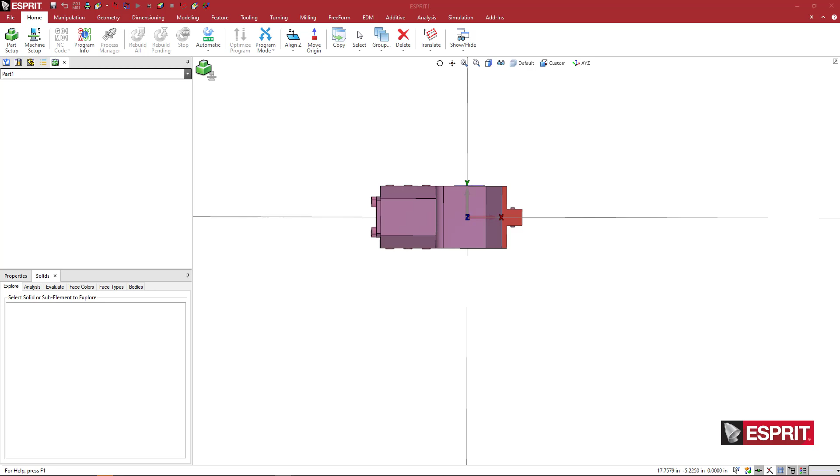Okay, so we're going to make a tool holder for an offset boring bar here, or ID work. And this one looks like it has the serrations, the notches on both sides.

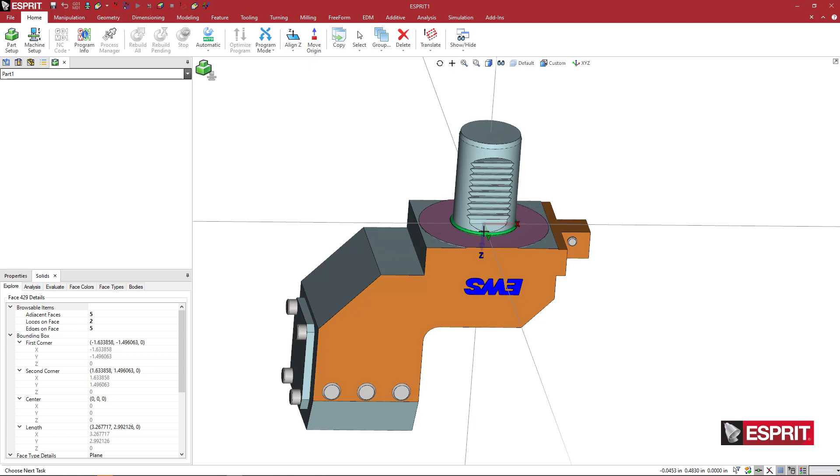The first thing we want to do is orient this in the correct orientation. This is the face that is going to be up against the turret. So when this is mounted on the OD, this face is going to be flush up against the turret, and the blue vector is normal to that, but we want it pointing the other way. So we can highlight this face and hit Align Z, and you'll see that it basically flips the model around.

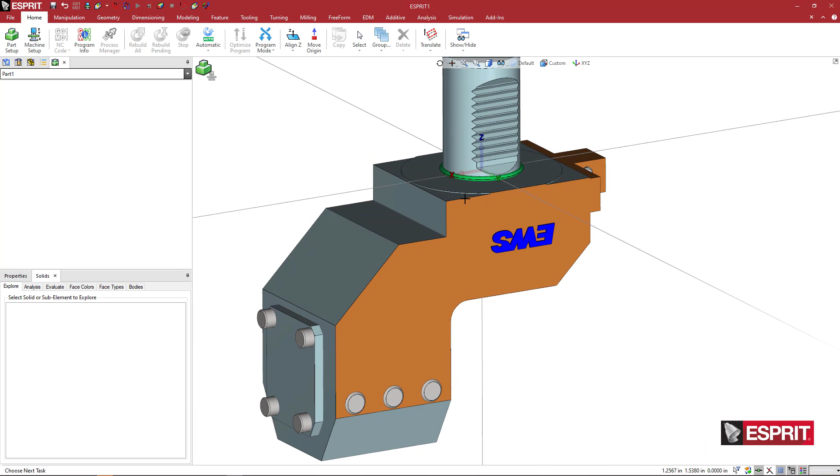And looking at this, this red X vector should point toward the main spindle. We have notches on both sides, so I believe this holder can be mounted in the machine either pointing toward the main or toward the sub, like the tool. This is the tool mount position down here.

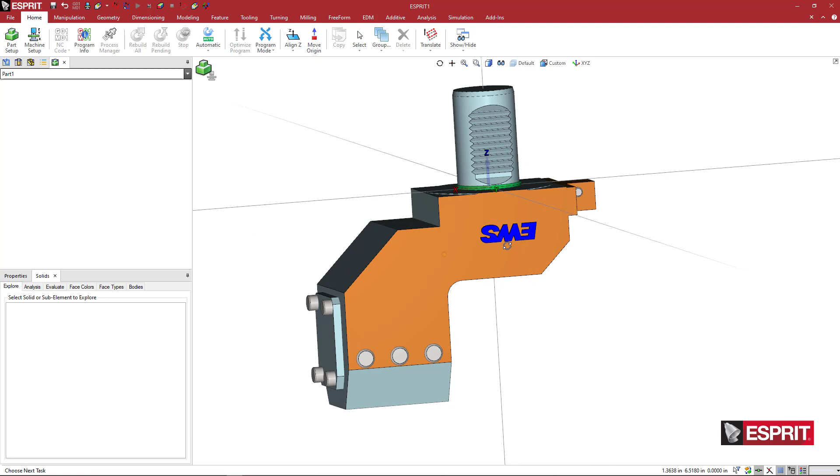Okay, so I had some messages popping up there. The tool is going to be going toward the sub spindle by default. If you've watched any of the other videos, you can always take this holder and flip it 180 degrees while it's mounted on the turret inside of ESPRIT. The tool and everything will move with it, so it's not a big deal if you want to go the other way. We don't need to make one for the main, one for the sub. We just need to make one, so I'm going to pick this orientation so that every time I load this onto a turret, by default, it's just going to be pointing toward the sub. And then if I want to edit that, I could do that later.

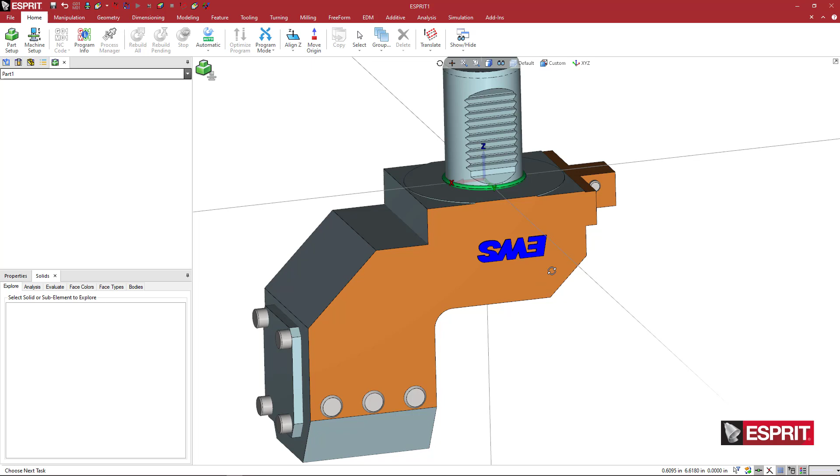So the first thing that I'm going to do is go ahead and make my tool position. What I want to do here is come to Translate, and you can access Translate from the home, then pick one of them. This is going to be the Translate. I'm going to move to, and you can see the highlight moves to the center selection of that face, of the bore on the face. So I'm just going to go ahead and pick that.

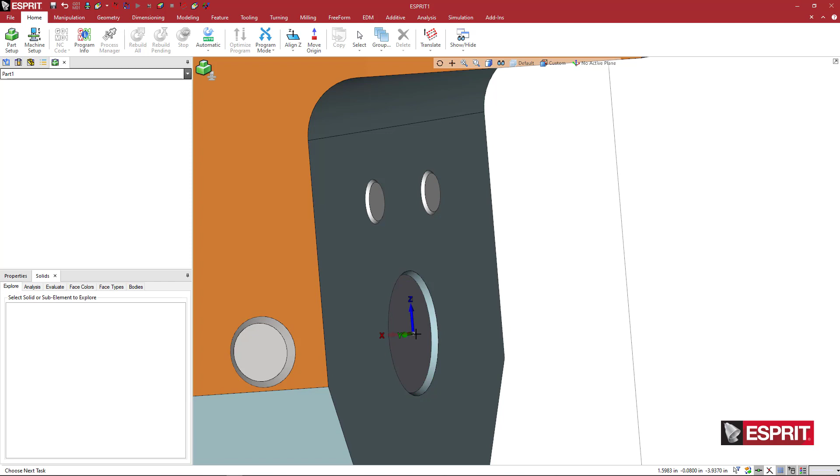Then what I want to do is flip this UVW around. So the first thing I'm going to do is rotate this, and I'm going to pick Rotate UVW. I'm going to rotate this about my y-axis. To keep this simple, I'm going to do this in 2 steps. The first thing it's asking for is the rotation about u right down here. We're going to put in 0, and then for the y we're going to put in 90, and then for the z we'll put in 0.

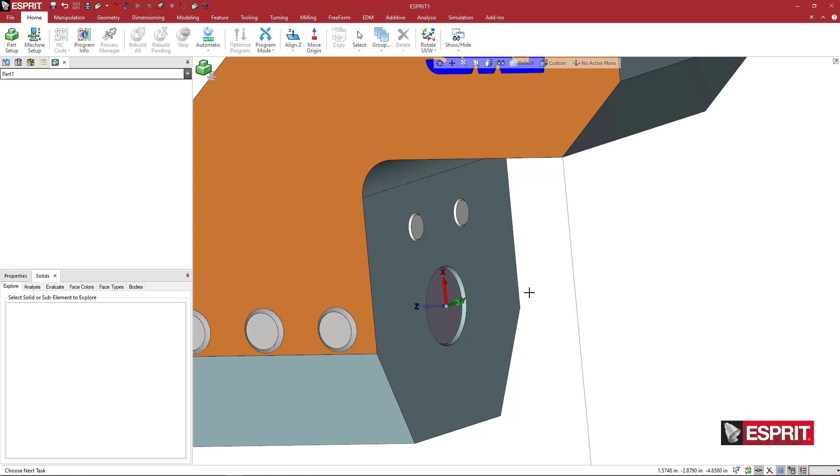And what this does is give me a tool orientation in the correct orientation, so the tool will start here and move toward the sub. But what I want is my insert pointing up toward the turret. So now I'm going to rotate this again. I'm going to hit rotate again and say 0, 0, 180 around the Z. So it flips so that the red is pointing upward.

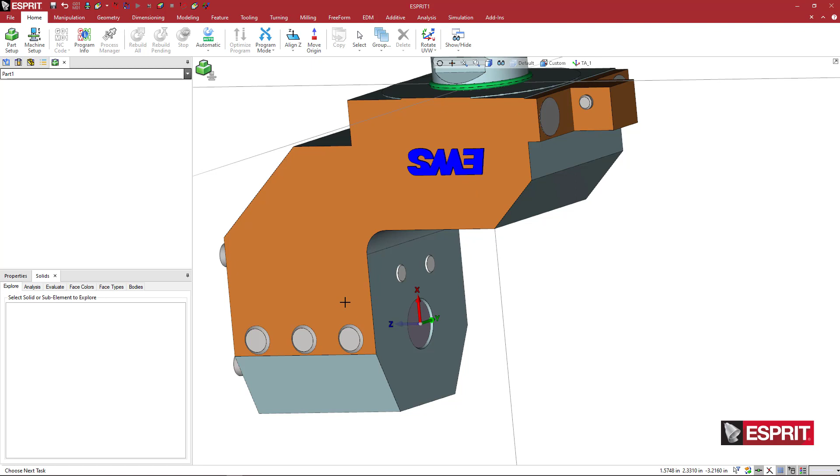At this point now, I can go ahead and create my holder adapter position, HA_1, and we can do TA_1. You might want to choose like TA or HA sub, but since this can flip back and forth, I'm just going to use 1 so that if I flip it, I'm not thinking, oh, it's sub. So I'm just going to do TA and HA1.

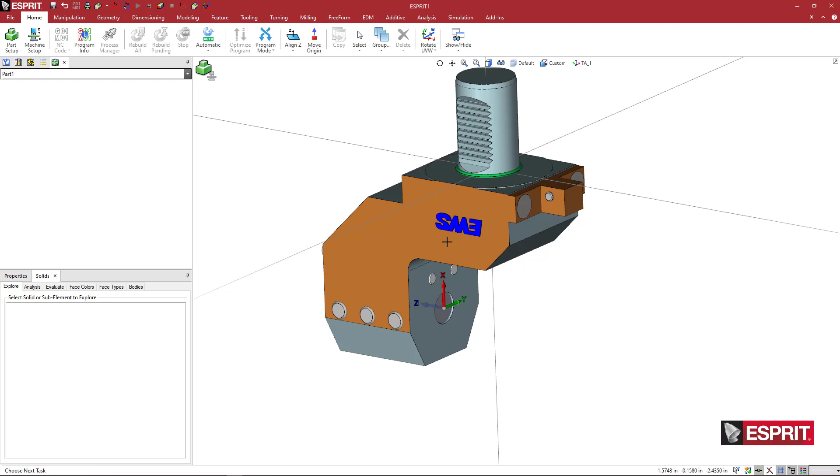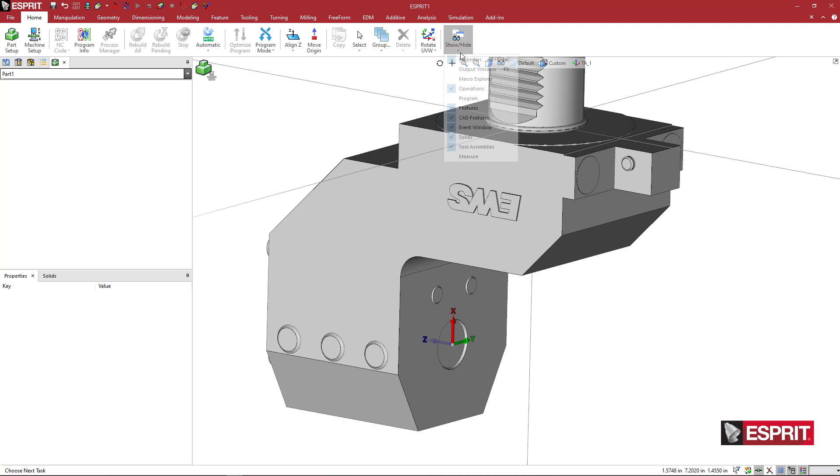So this is done. At this point, I can save my tool holder here for a simulation solid. However, the reason I don't want to do that yet is because I would prefer to change some of these colors. We've got some orange and green and whatever this is, like a greenish blue. I'm going to change this all. So I'm going to right click and say select all, come to properties, and pick light gray. Properties is accessible under home, then show hide properties, turn it on or off.

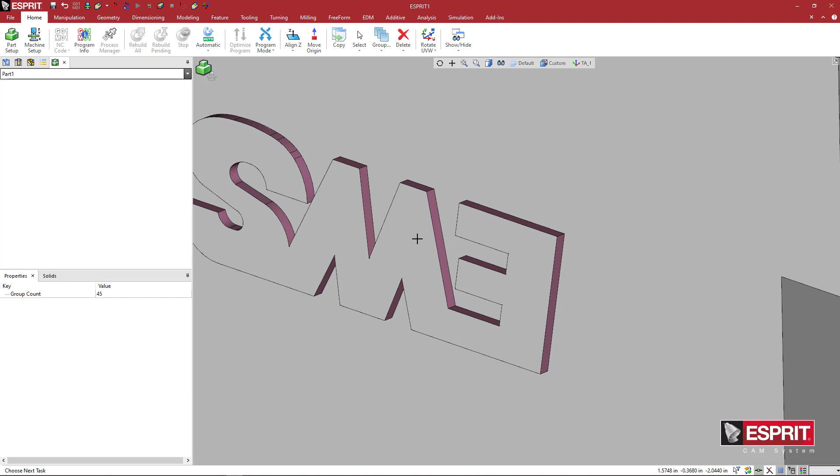If you've watched any other videos, we could use grouping propagation here, accessible right at this icon, propagation. If I click on this, I want to make sure that for my edge, I'm selected for opposite edges. When I do that, if I hold my shift key down on the keyboard and pick this edge, you can see it will grab that whole ribbon of material, and then I'm just going to hold the control key and add to the group this top face. I'm going to right click, go ahead to the blue color and say OK a couple times. Now if I click elsewhere, we have a uniform looking tool holder.

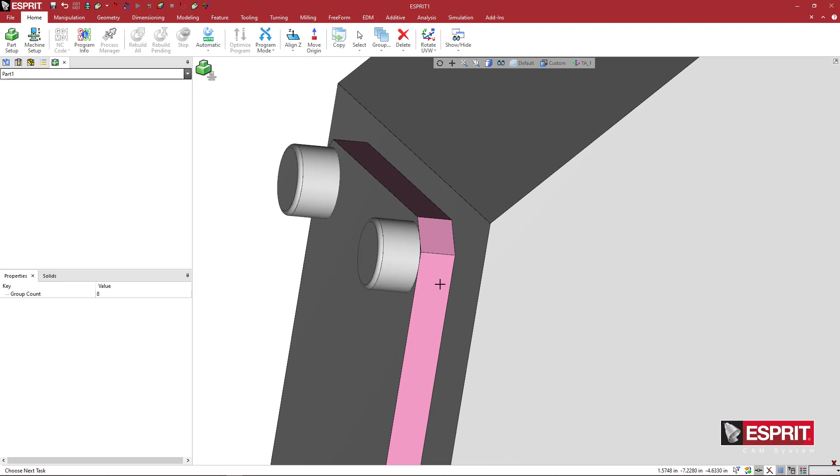And you could do some other things. I could use that edge, grab these edges, add this face, come over here and pick a different color of gray, maybe a dark gray. A lot of these holders have corrosion protection, so it's darker. But whatever, you can do whatever you want here.

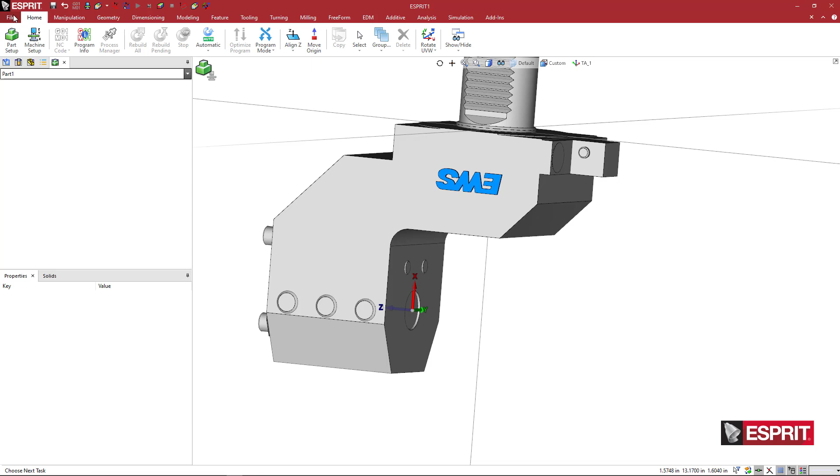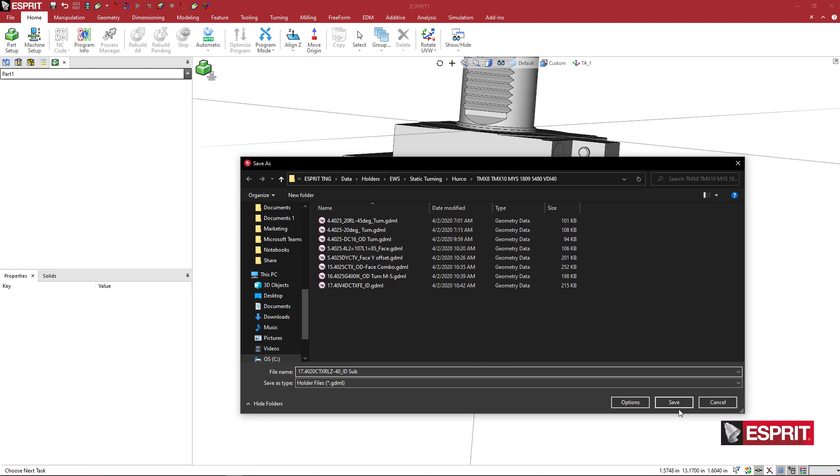So at this point now, I'm going to go ahead and save this out. I'll come to File, Save As. We're going to go to a holder file, GDML, and this is an EWS for turning, and I've got these VDI 40s all under this particular folder. I'm just going to put an underscore ID, and I will put sub here just so I know when I open it, it will default to the sub. And now we can start using this holder.